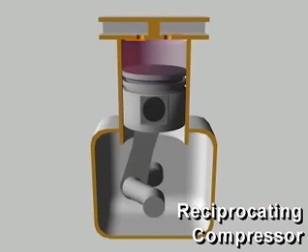A reciprocating compressor compresses refrigerant vapor in a cylinder using a piston. In a way, reciprocating compressors are like automobile engines. The pistons are directly driven through a wrist pin and connecting rod from a crankshaft.

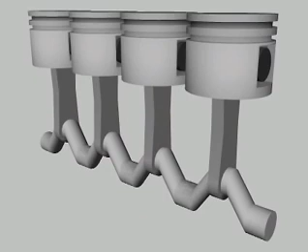Depending on their size, reciprocating compressors may have one or more cylinders. Multiple cylinders may be arranged in line, opposed, or in a V.

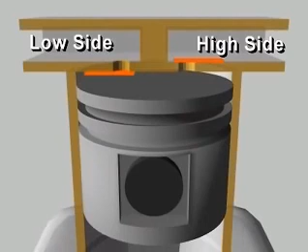In each cylinder, reciprocating compressors have both a suction valve and a discharge valve. These valves give the compressor its ability to pump refrigerant vapor against a pressure difference. They are usually located in the head of the cylinder, in passages connected to the high or low pressure side of the system. Let's follow the compression process in a single-cylinder reciprocating compressor during one complete revolution of the crankshaft.

Starting with the piston at the top of its stroke, or at top dead center, the piston begins to move downward as the crankshaft rotates. Because both valves are closed, the downward moving piston reduces the pressure in the cylinder.

As the pressure in the cylinder falls below the low side pressure in the suction line, the pressure difference opens the suction valve, letting refrigerant vapor flow into the cylinder. The piston continues down and pulls in more vapor until the cylinder is filled with low-pressure vapor at the bottom of its stroke. Once past bottom dead center, the piston begins its upward stroke.

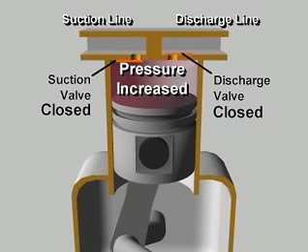The suction valve closes. As the piston moves up, it reduces the volume of the space in the cylinder, increasing the pressure of the vapor. When the pressure in the cylinder exceeds the high side pressure in the discharge line, the pressure difference pushes the discharge valve open, letting the compressed vapor flow out of the cylinder.

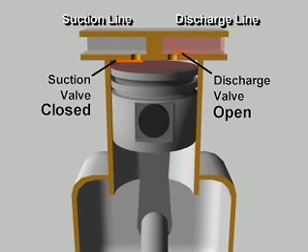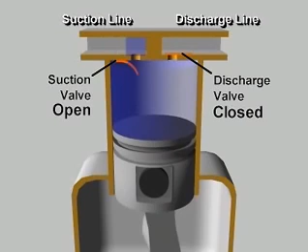This continues until the piston reaches the top of its stroke and most of the compressed vapor has been expelled into the discharge line. When the piston begins its downward stroke, the discharge valve closes. The complete cycle then repeats during each revolution of the crankshaft. This is the mechanical positive displacement vapor compression cycle using a reciprocating compressor.